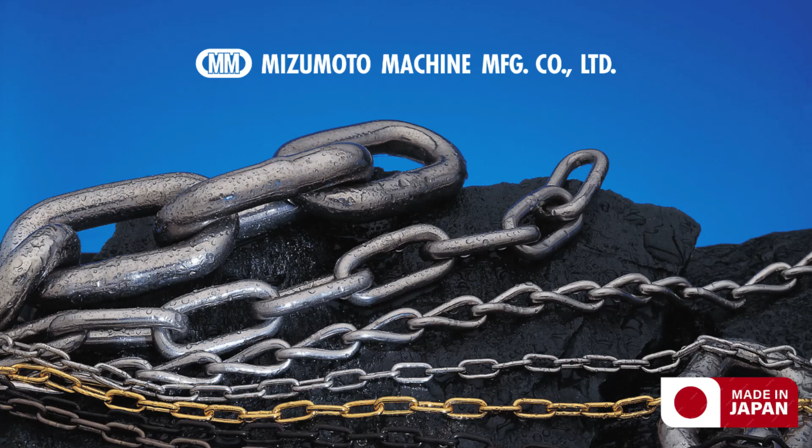At U.S. Fastener Import and Trading Company, we're proud to introduce Mizumoto Machine Manufacturing Company, Japan's leader in precision-engineered stainless steel chains.

Mizumoto offers an extensive range of high-quality stainless steel link chains built for exceptional safety, strength, and durability across industries like marine, construction, shipbuilding, and more.

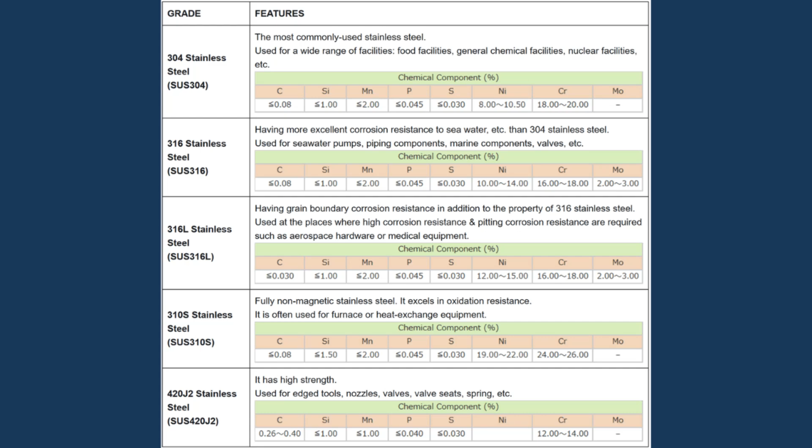Unlike conventional chains, Mizumoto's chains feature a completely welded design. This proprietary welding method ensures unparalleled tensile strength and safety, reducing the risk of breakage. Look for the blackened area for proof of full weld penetration.

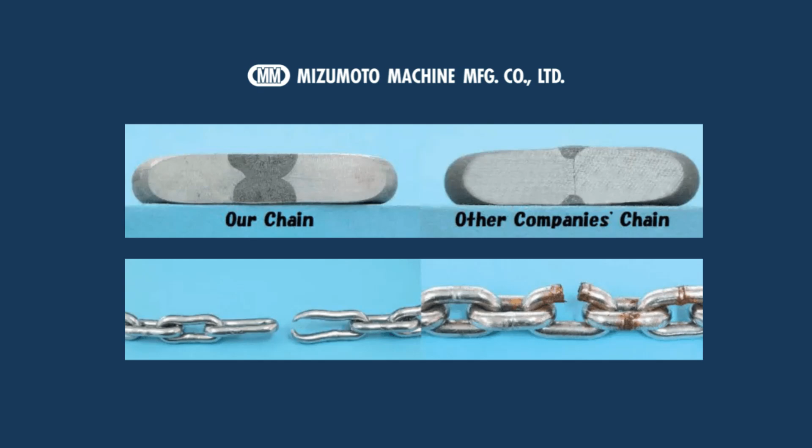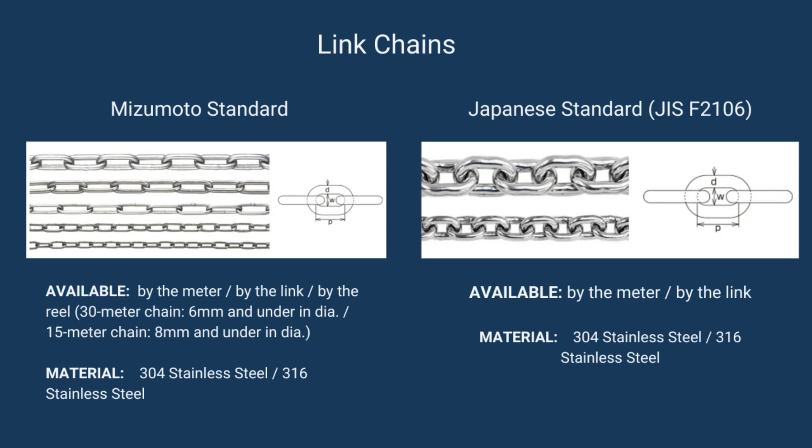Mizumoto's stainless steel link chains offer high tensile strength and durability for general use. Available in two options: Mizumoto Standard and JIS Standard, both crafted from 304 or 316 stainless steel. Chains are available by the meter, link, or reels to suit your needs, whether it's 30-meter reels for smaller diameters or 15-meter reels for thicker chains.

Safety is paramount for children's facilities like playgrounds, preschools, and amusement parks. Mizumoto's child-safe swing chains ensure safety with aluminum-filled stainless steel links that prevent fingers from getting caught. Customize your swing chains with 5 vibrant filling colors: plain, yellow gold, blue, green, and pink red. Available by the meter or link, these chains combine safety, strength, and aesthetics.

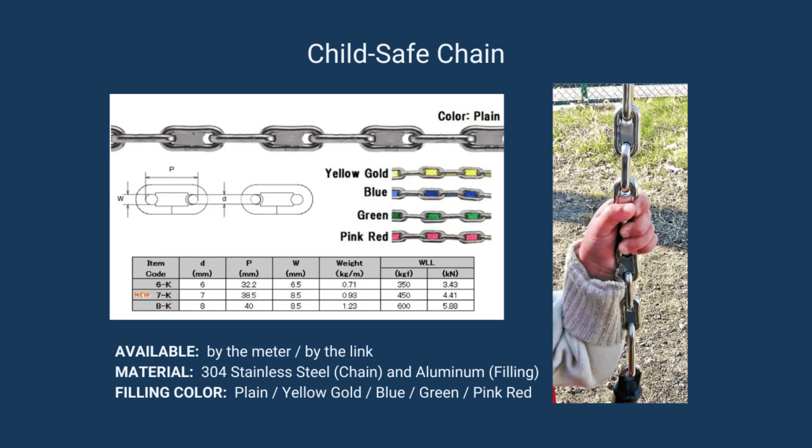For noise reduction and scratch prevention, Mizumoto's protection chains are encased in a PVC resin tube. Available in 7 colors: transparent, orange, yellow, black, red, green, and blue. These chains are perfect for securing bicycles, motorcycles, and safety zones. Mizumoto's unique welding method ensures high tensile strength while the PVC coating prevents damage and enhances longevity.

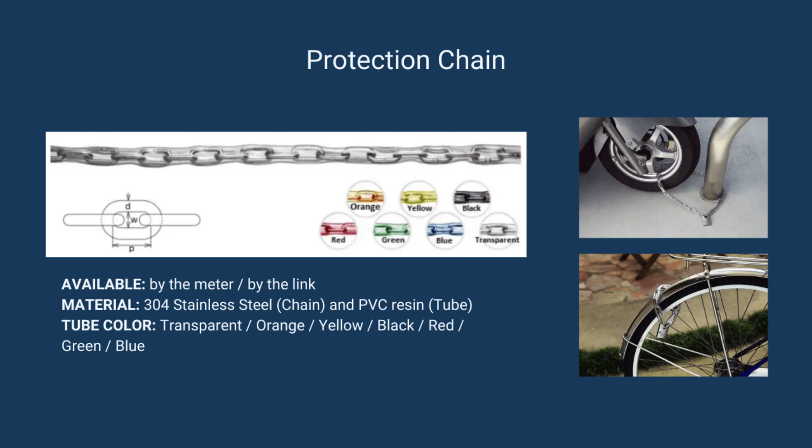Designed for anti-theft solutions, Mizumoto's security chains offer superior hardness and strength. Choose from stainless special steel chains with hardness 3 times that of 304 stainless steel, or safety chains equipped with oval rings for enhanced locking. Optional features include PVC coating and stainless steel padlocks. Custom lengths are available for precision security applications up to 2,000 millimeters.

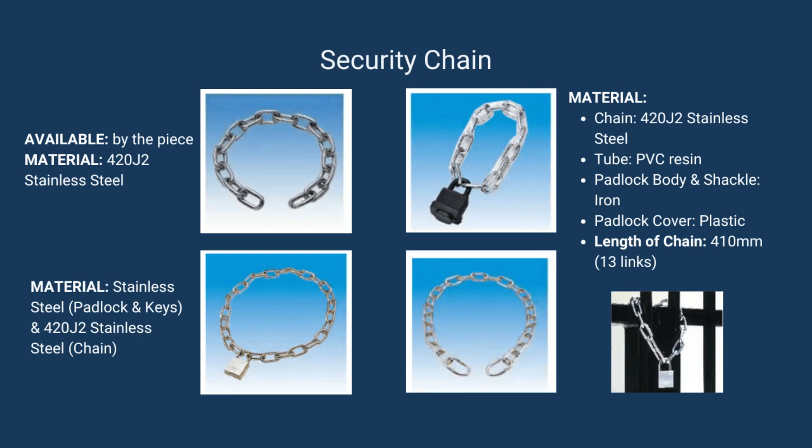Add style to your projects with Mizumoto's decorative chains. Choose from a variety of options including ball chains for hanging decor, twist chains and mantle chains with intricate, non-welded designs, and color-plated chains, available in 18-karat gold, bronze, and black finishes. These chains are perfect for ornaments, interior decor, and accessories and are available by the meter, link, or reel.

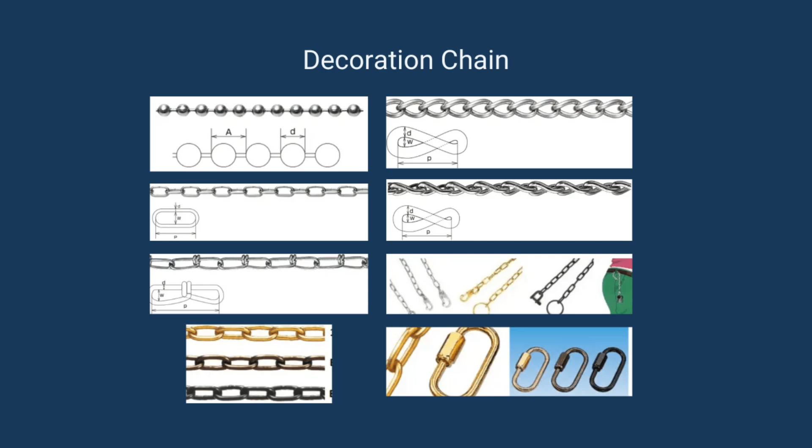Every project is unique, and Mizumoto specializes in customized chain solutions. From chains for heat exchangers and submersible pumps to assembled fittings and gardening tools, we deliver tailor-made solutions. Simply provide specifications, drawings, or requirements, and we'll craft stainless steel products that meet your exact needs.

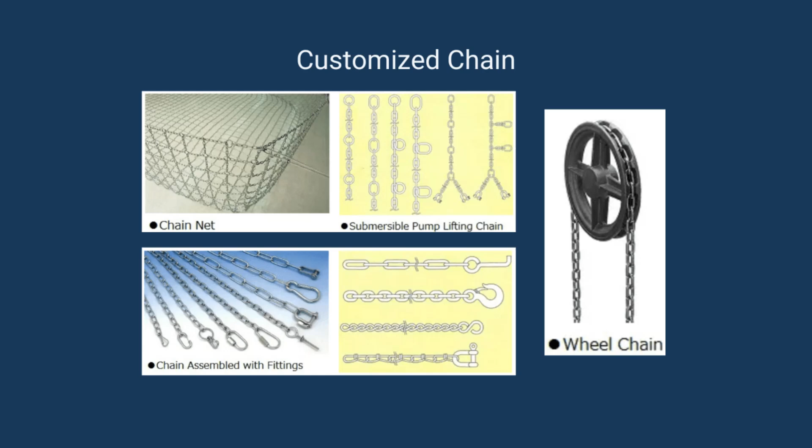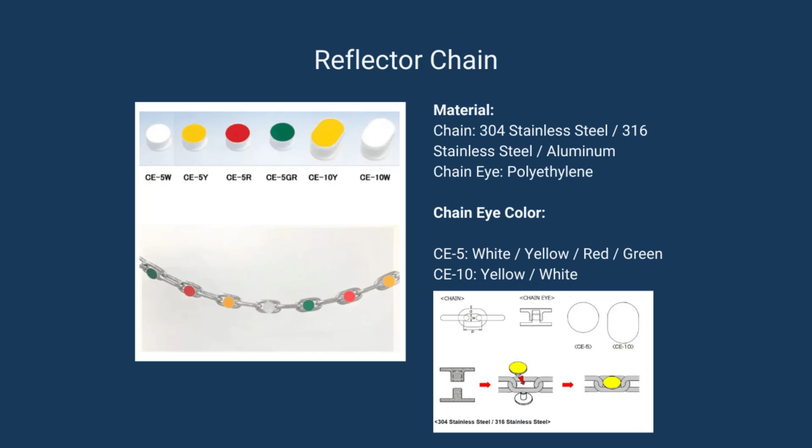For low-light environments, Mizumoto's reflector chains enhance visibility and safety. Attach a chain eye reflector to any chain for higher visibility, making it ideal for parks, roads, and dark areas. Available in multiple colors like white, yellow, red, and green, this simple solution reduces safety risks in minimal lighting conditions.

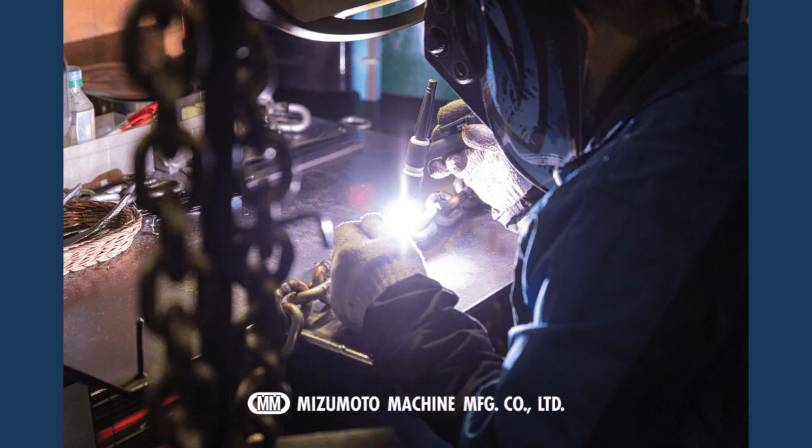If you need a specific solution, Mizumoto offers custom stainless steel chain products, expertly tailored to meet unique specifications, including assembled fittings and specialty designs. To guarantee safety and performance, Mizumoto conducts in-house tensile strength testing for loads up to 30 tons. Certificates of material and inspection are available on request.

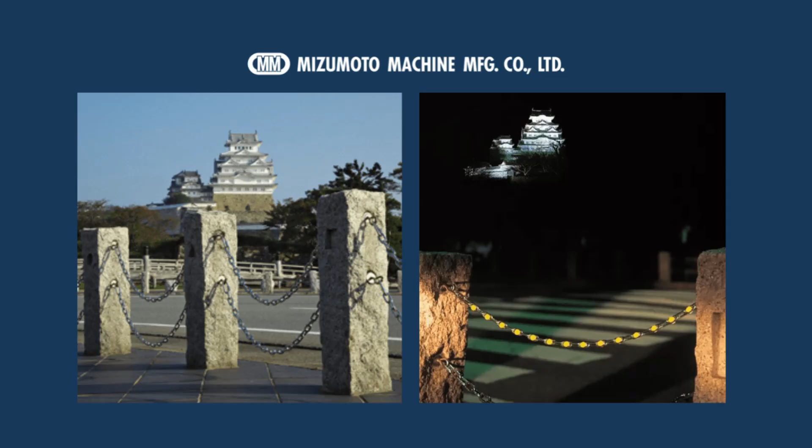Mizumoto's stainless steel chains are used in the areas surrounding the Himeji Castle in Himeji, a city in the Hyogo Prefecture of Japan. The castle's construction dates to 1333 and is regarded as the finest surviving example of prototypical Japanese castle architecture, comprising a network of 83 rooms with advanced defensive systems from the feudal period.